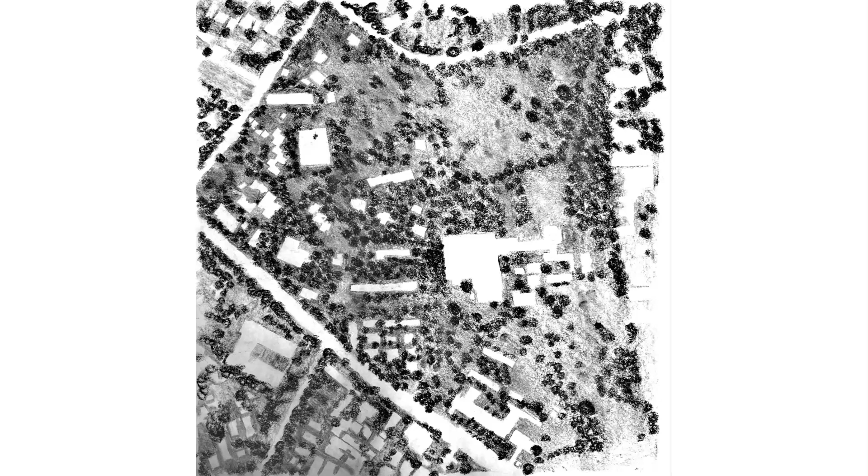Consortium Archives. While the University Consortium Archives draws students, faculties, and professors to the University Consortium Park, the auditorium tucked within the Archives building becomes essential for civic engagement. However, the way the current approach is focused towards the main four-storied building, one has to deviate from this context to reach the auditorium.

While the north-south circulation within the space seems ideal considering the form of the auditorium, the entry-exits for the space separate the auditorium from the opportunity to establish its connection with a much more active built context surrounding it. This winding circuit for the act of departure, the current entrance porch, makes the lobby irrelevant for a building purely of a public nature.

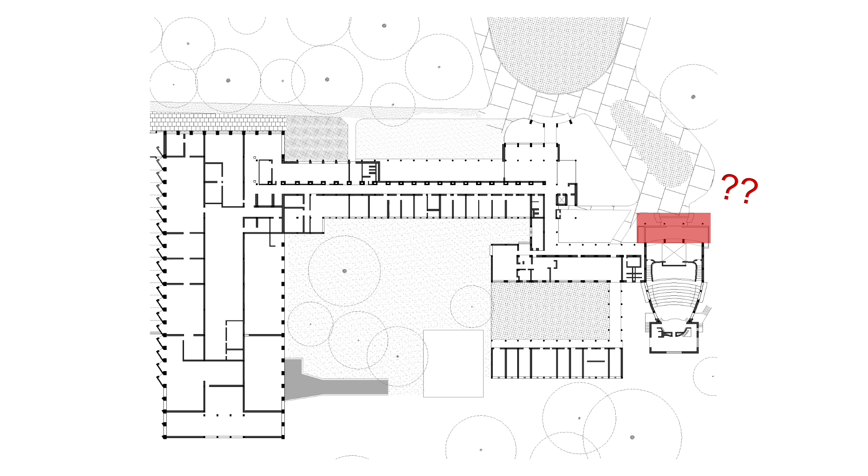For a similar nature of the program, University Consortium Archives, it inquires about reimagining this lobby, as a lobby is also a meeting for buildings, other than the only function of circulating within them. In spite of a large clearing along the approach, the proximity from the auditorium disregards the relationship it could have built to host a large gathering for a public natured building.

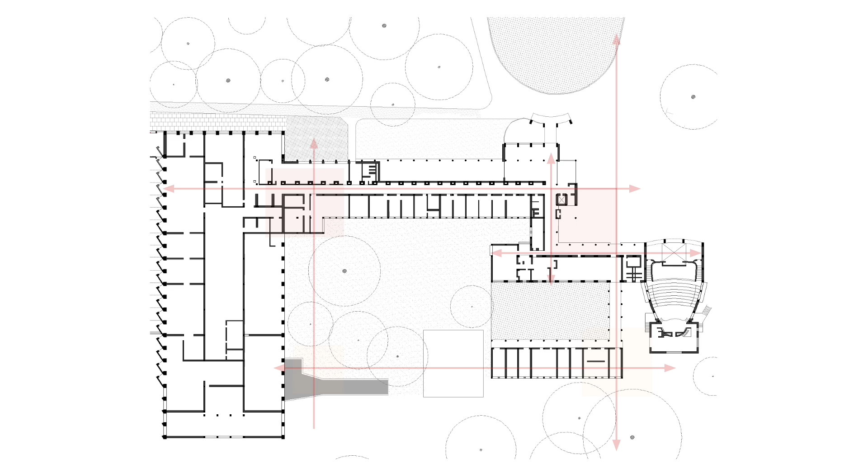By discarding the existing lobby and reorienting along east-west, it develops a relationship between the auditorium and the bigger room of the plaza, going back to the idea of possible main and secondary nodes within the complex. While the volume is capable of seating a gathering as big as 400 people at a time, the internal arrangement is kept unaltered, intending to envelop the core in relation to its exterior surrounding.

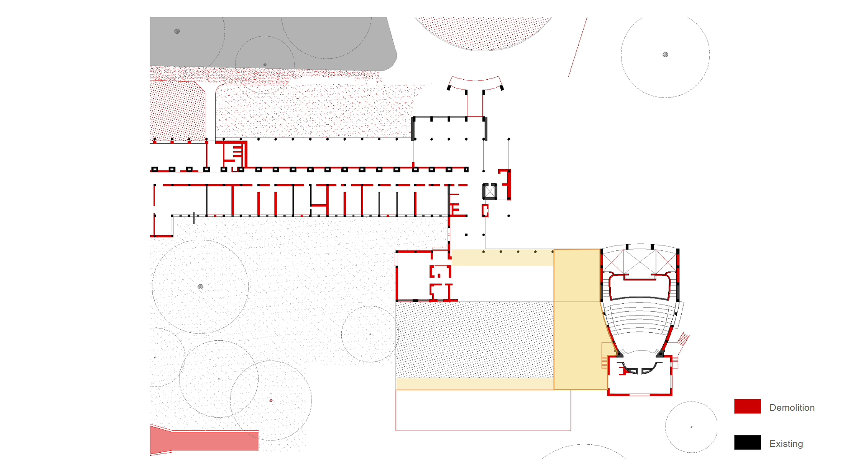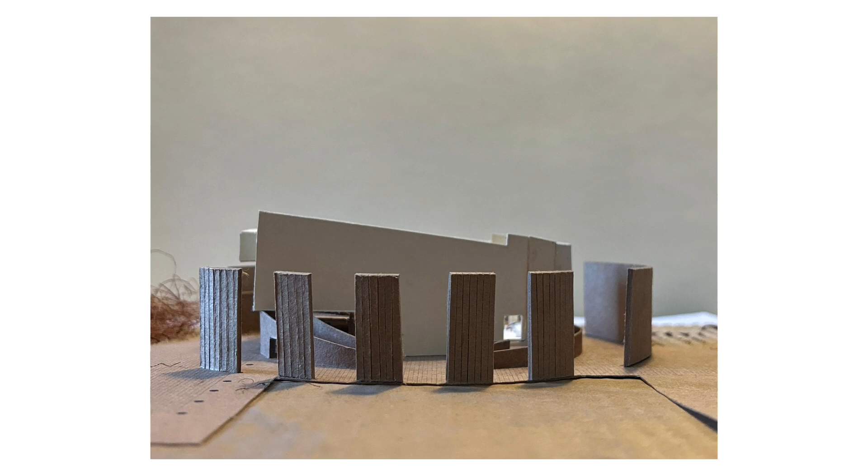For the same, to emphasize the importance of this institution, the existing approach shifts to the western front, replaced by the canteen block and chemistry labs. The canteen and chemistry labs share a garden room mediating from this rear end to the main building through corridors, which are retained for means of connection, allowing the auditorium to enhance its new front when passed by the colonnade. Isn't it memorable to pass through merely columns, reminding of the place it used to be?

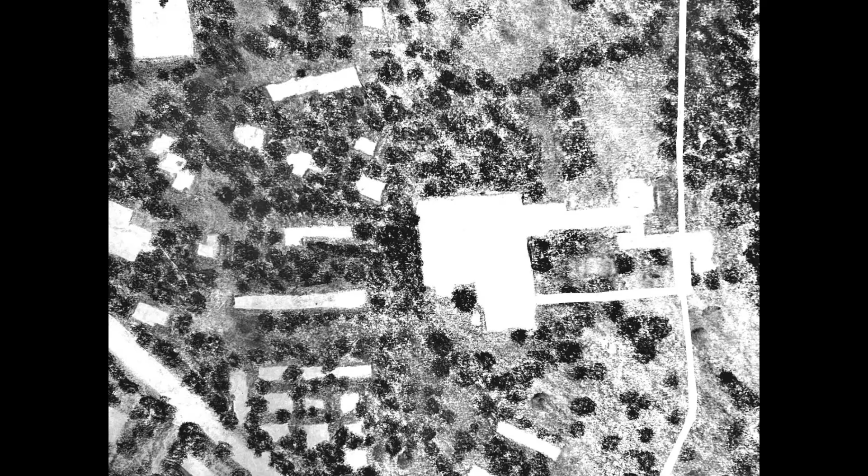What is happening despite the reunion of buildings when the entrance lobby is reoriented to east-west from north-south direction? And how is the purpose of a cohesive build served? The idea of a walkable corridor on either end of the auditorium extends the idea of the envelope, only tweaked a little with some softness of the curves. The shaded path here with the colonnade distinguishes the degree of pedestrian and vehicular threshold between buildings, to be able to enjoy a walk within the institution rather than a road majorly functioning for transportation.

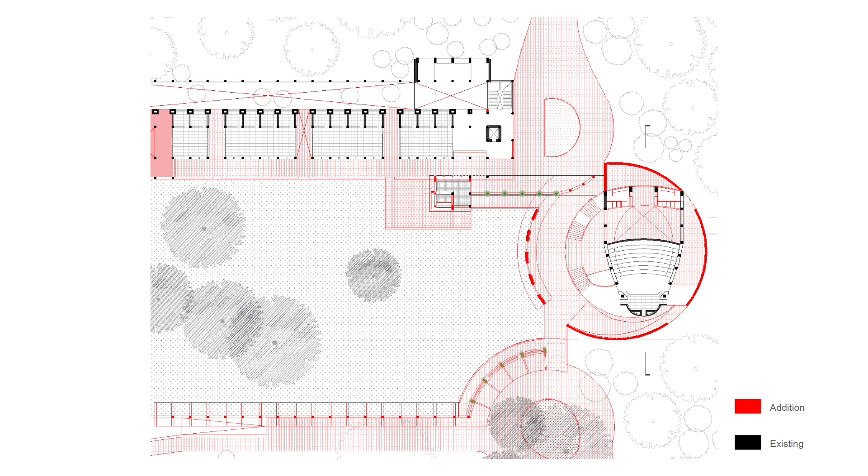Nestled within the overgrowth, the main north-south circulation loops around at respective ends with drop-offs to confine the vehicular traffic from meandering into the University Consortium Archives. For a rare experience of pleasurable walks in an institutional environment, the pathway becomes the only pedestrian corridor in the campus that passes by buildings and not through them. The buildings this way become visual gateways to the experience of transcending into the wild, not the gated objects we usually think of.

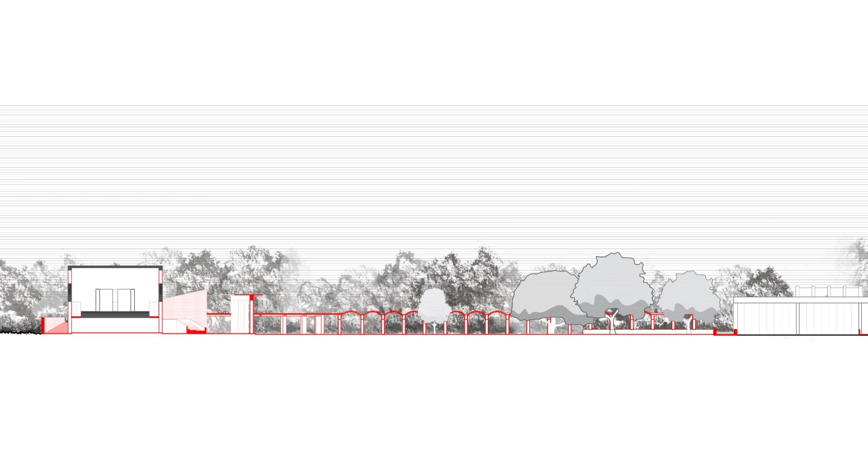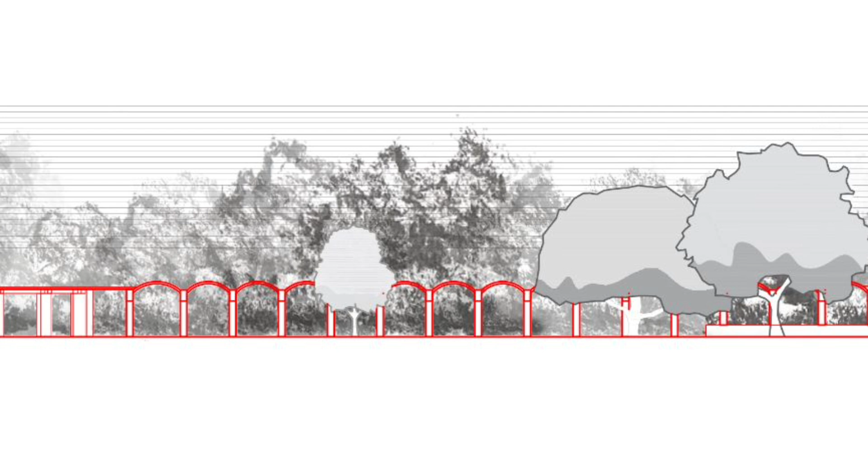Even though the north-south path remains the primary one, a wave-like vaulted pathway extends towards the archives, a path favorable for pedestrians to walk at any time of the day with glimpses of Kanvinde's icon, but this time in a different frame. A two-way frame where on the other side the colonnade is like an open gateway for the beauty of the wild, looked at from a very fine garden room. Beyond gardens thought of as merely an act of landscape design, this garden also establishes a hierarchy between the building of archives and the auditorium, connected by an open plaza.

Just how the inside skin is layered within the outside skin of an onion, the outer skin here holds the auditorium of its value, a lobby of a circular form. In this situation, it humbly wraps the core in grandeur. It also contrasts with the formal, precise, and disciplined nature of circulation within and outside the archives, which brings two distinct experiences of built form in a single neighborhood.

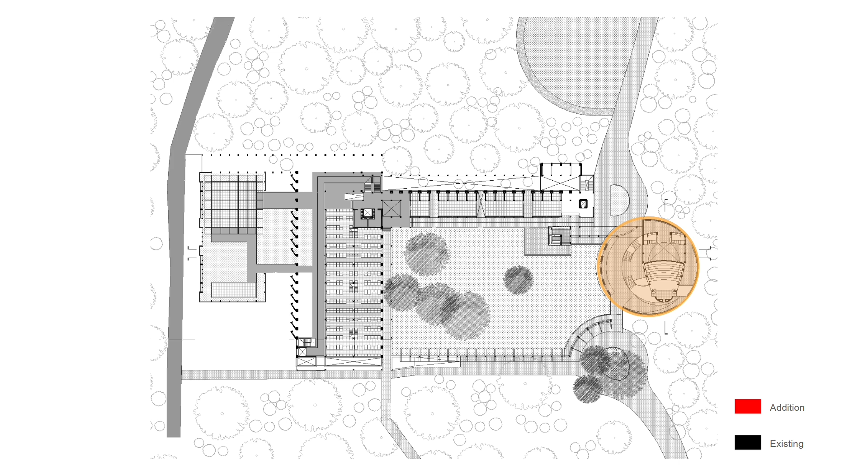The lobby, by means of a bulging curved pathway, envelops the auditorium core from its new front, while a secondary pathway runs within the tighter wrap of the wall, allowing access to service spaces of restrooms and green rooms, and where one would also slowly like to pass alongside the unusual wildness. The curved lobby acknowledges the original idea of entry points at upper and lower ends, serviceable to the conditional access at times of an active auditorium space.

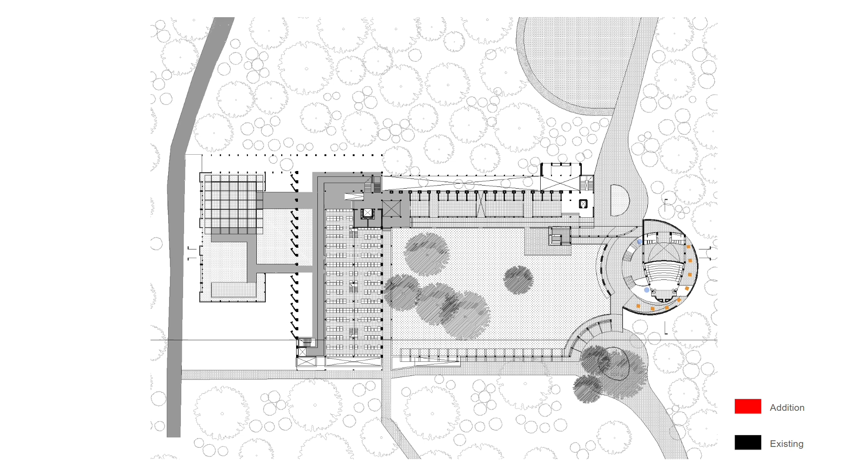When a larger group or gathering is catered to at a time, as much as the arrival, the departure serves as a place for their dispersion. The thought of enjoyment and active engagement departing from an event is generated when a sense of leisure is present to descend into. And from anywhere within the fine garden, one could gracefully enjoy watching the wild overgrowth in the backdrop.

The open plaza is therefore reimagined as a large garden room that holds each institutional building in cohesion. Hence, the southern facade is no longer treated as the backside, rather it becomes as important as the northern facade.